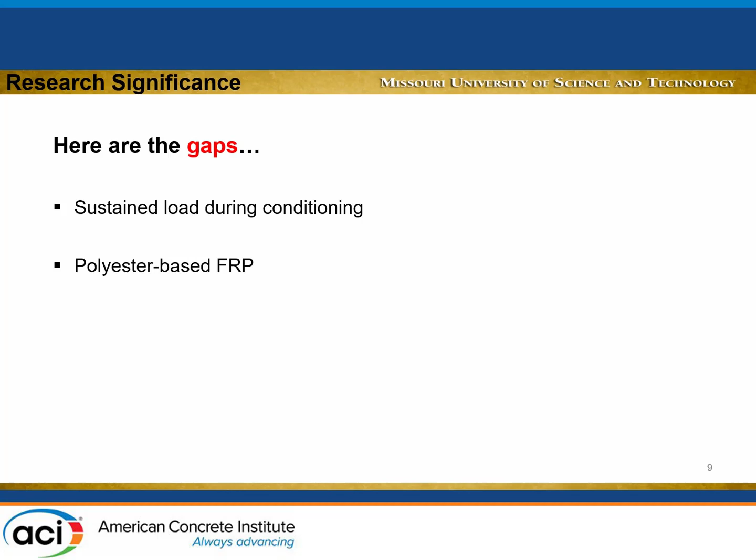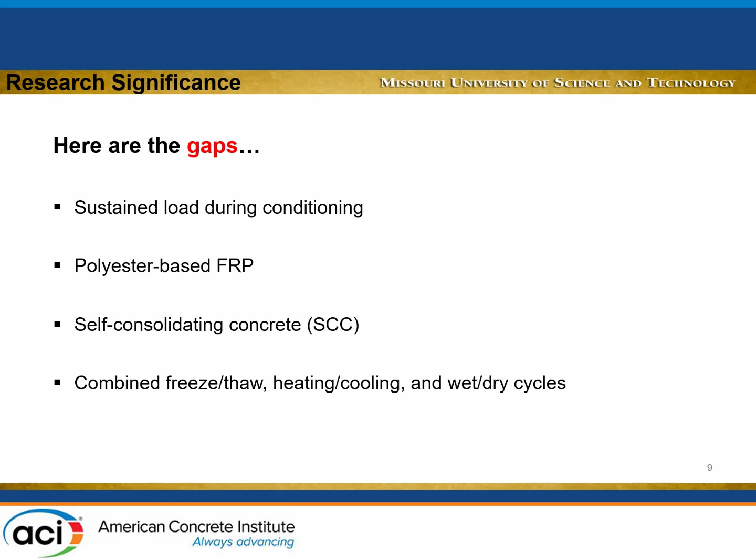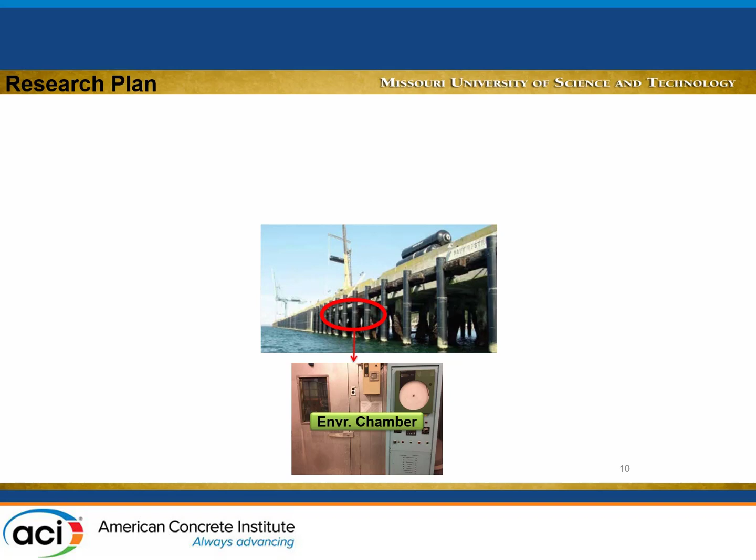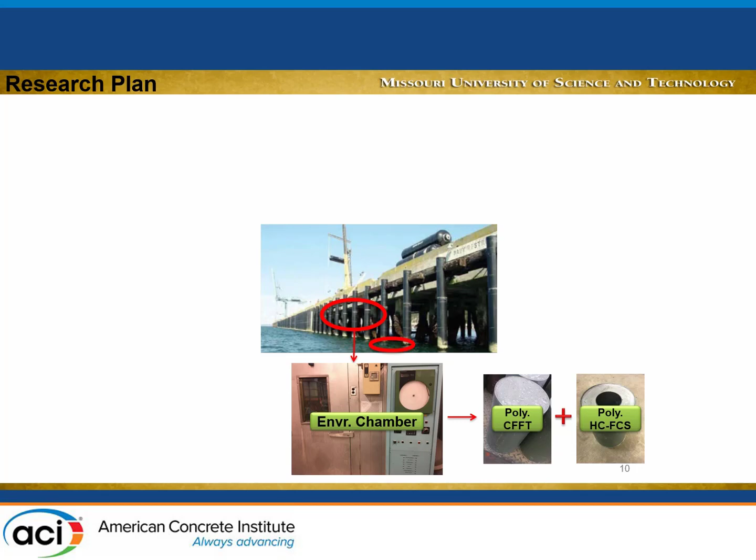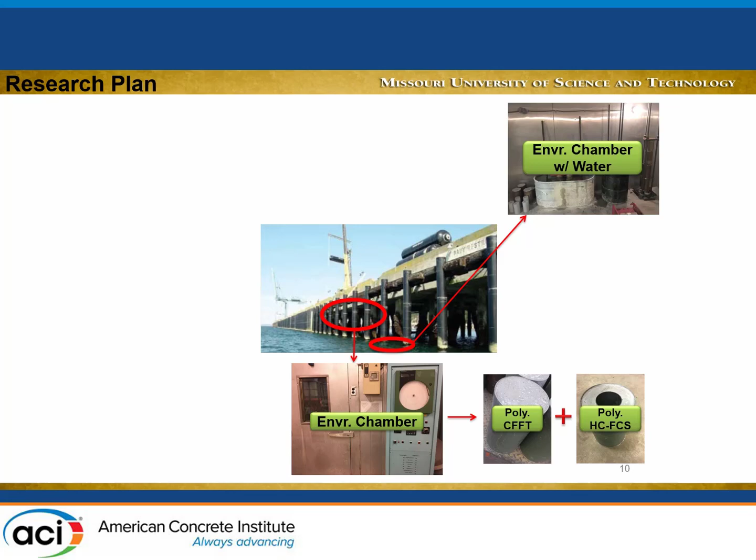There is another portion over here, still subjected to environmental conditions, however it is immersed in water. So we have a second set placed also in the environmental chamber, but rather than a dry condition, we immersed the fiber tubes into water tanks, so they're immersed all the time while we run the different cycles.

The upper portion over here is still subjected to UV. We have some rings of these tubes subject to being placed in a UV chamber. These are the rings that we use for the UV chamber.

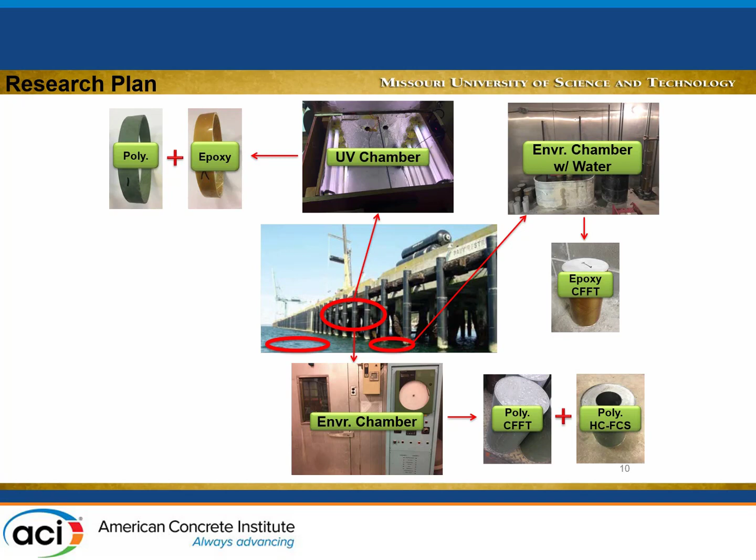As I mentioned, we have two different types of pipes: the polyester type and the epoxy pipe. The color is different. This is just the producer.

And then the last part, the one immersed in water, if it's salt water, we have these tanks where we immersed the pipes, or the concrete filled tubes and the hollow core columns, both immersed into the salt water solution for a long period, up to one year.

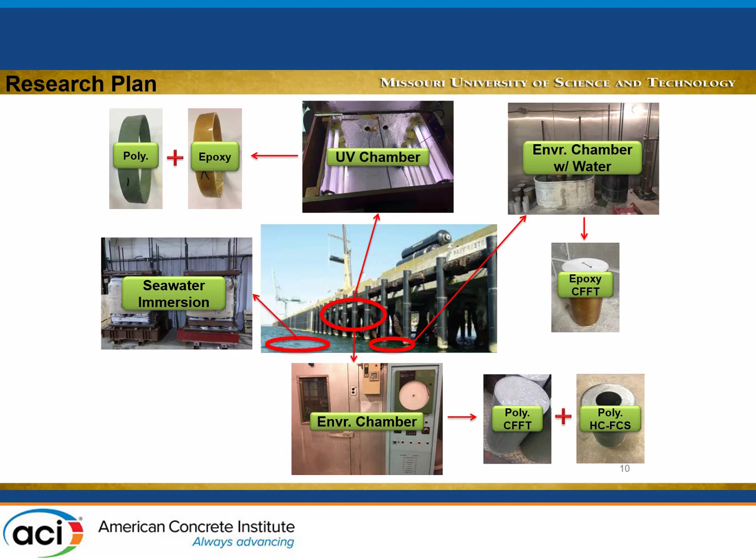All of them are subjected to axial loads while we are testing them, as you will see on the test matrix in a minute. So the first group here are the concrete filled tube and hollow core fiber concrete steel columns, placed on the environmental chamber.

The first group is unconditioned, unloaded. Those are just 3 specimens placed in the lab, poured using the same concrete. Everything is the same, which is why we call them unconditioned and unloaded.

The second group is conditioned, unloaded, placed inside the environmental chamber while unloaded. The third one is conditioned and loaded.

So we have them all placed inside the environmental chamber under sustained load. The sustained load here, typical in bridge columns, is somewhere between 7 to 10%, depending on where you are in the States. So we apply 10% of the axial capacity of the tubes.

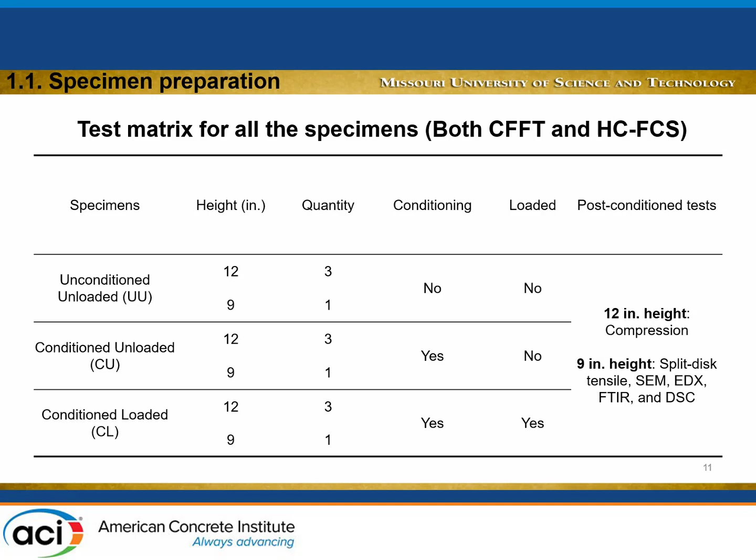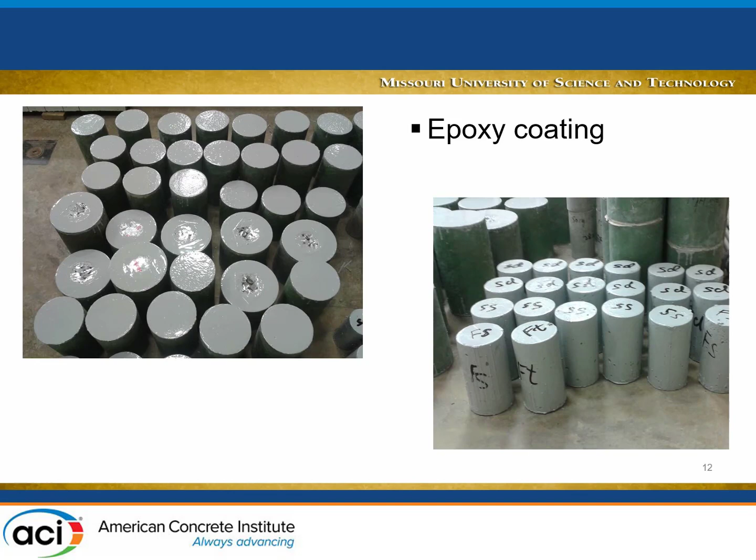Here are the tubes. We have epoxy coating to ensure that all the interaction between the pipes and the environmental chamber goes through the glass fiber tubes only. We also place some concrete cylinders to see what's going on with the concrete itself, so we can draw conclusions about the concrete as well.

So here is the set of specimens. We have 3 sets that we are going to test in compression under cyclic axial loads. The first one is a little bit shorter - for this one we knock off the concrete from inside, slice it, and take the rings for further examination.

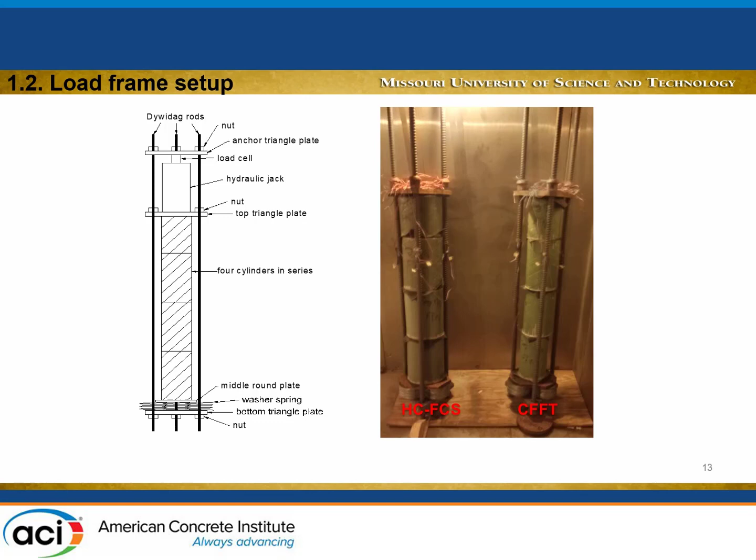We apply the axial load using unbonded post-tensioning, and we have a bunch of strain gauges over here to follow what's going on.

The second group is the one that was immersed in water and placed inside the environmental chamber. So we have the unconditioned one: no load no water, no load with water, loaded no water, loaded with water - different combinations within this group.

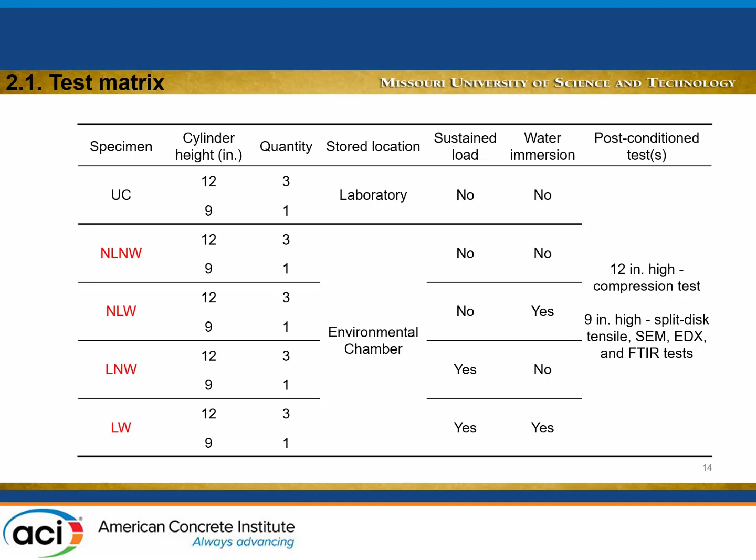This group over here uses epoxy resin, while the first one uses polyester resin. So here are the specimens, loaded with water. Again, we apply loading using Dywidag bars to apply the 10% axial capacity to the columns.

The environmental chamber loading is a little bit complicated. The test regime for the environmental chamber is actually a separate study. A while ago, we had students who collected the bad weather data in Missouri for 20 years, and we compressed all of that bad weather into 72 days.

So we compressed the analysis for about 20 years of periods. It was originally prepared for repair, but we're still using it with MoDOT. So we collected the weather data over 20 years, looked at the bad days, and compressed them into a short period. It ended up with 72 days.

What we have here is 50 cycles of plus or minus, so we move between minus 20 to 10 Celsius, then another 50 cycles between higher temperatures, 50 cycles with relative humidity, and then temperature, humidity, and so on. So the total, as I mentioned, is 72 days or 350 cycles of loading.

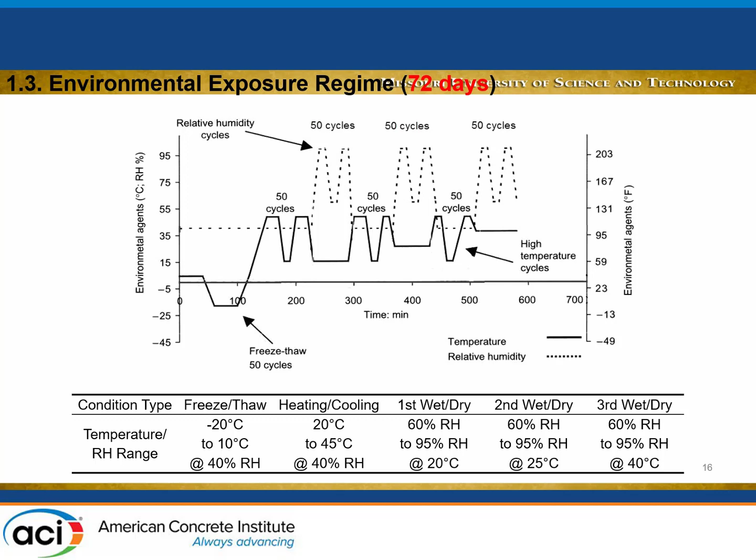The third group of specimens were subjected to, again, unconditioned testing, and then we have these three different tanks. So T1, T2, T3 representing different temperatures, ranging from about 73 up to 140 Fahrenheit. We have three different temperatures, and we ensure the temperature is constant by keeping the water moving, and ensure the salt solution concentration is the same. We take samples of the water every week to ensure the salt solution concentration is consistent.

In total, we have 51 specimens for the hollow core fiber concrete steel, and another 51 specimens for the concrete filled fiber tube.

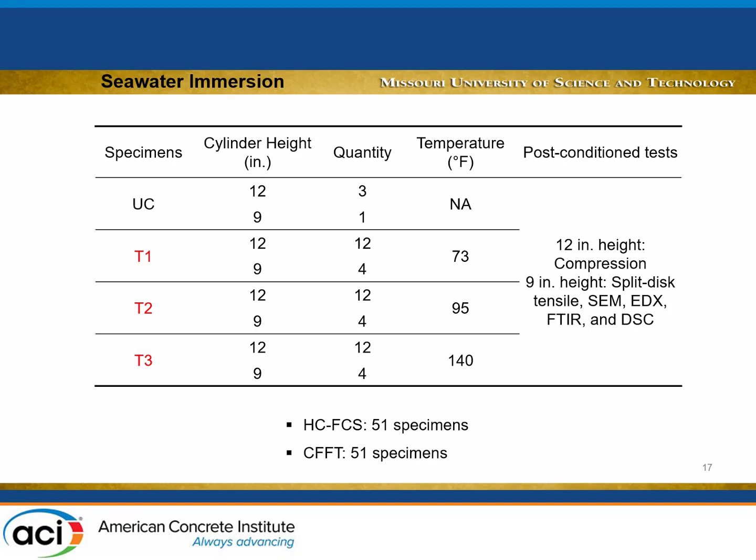For those, we go every 3 months for each tank, and we take some specimens and test them in compression. We run microstructure analysis on all the samples so we can track how the strength degrades over the year. So for each tank, we tested specimens at 4 different periods. During the presentation, we're going to call them B1, B2, B3, B4.

So here is the test setup. What we did for each tank, since it's the same temperature, is have five sets of specimens of concrete filled fiber tubes, and then on the same tank we have 5 sets of the hollow core fiber. And then we have a steel plate.

We load using the Dywidag bars, and we have springs to ensure that the load is constant with time. We have HSS where we can anchor the Dywidag bars. We have load cells and strain gauges on the Dywidag bars, and we regularly monitor the loads and strains to ensure it's constant during testing.

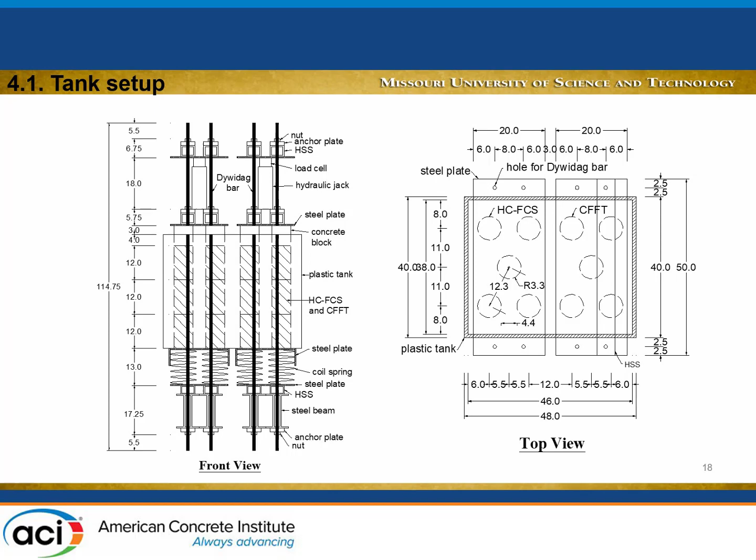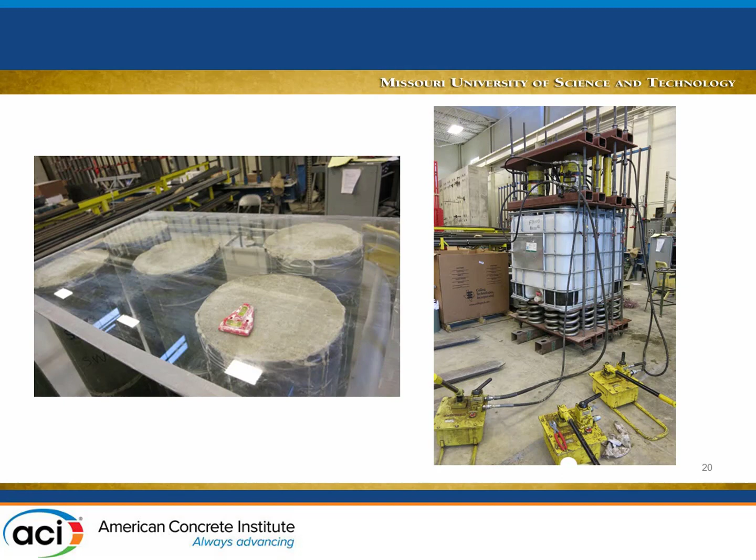And this is a tank. This is how the test setup looks like, and this is while we are loading the test specimens, and this is just how it looks.

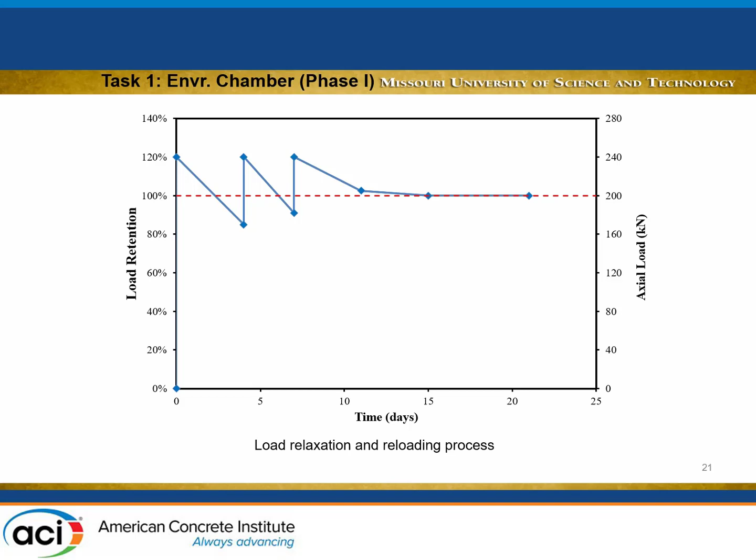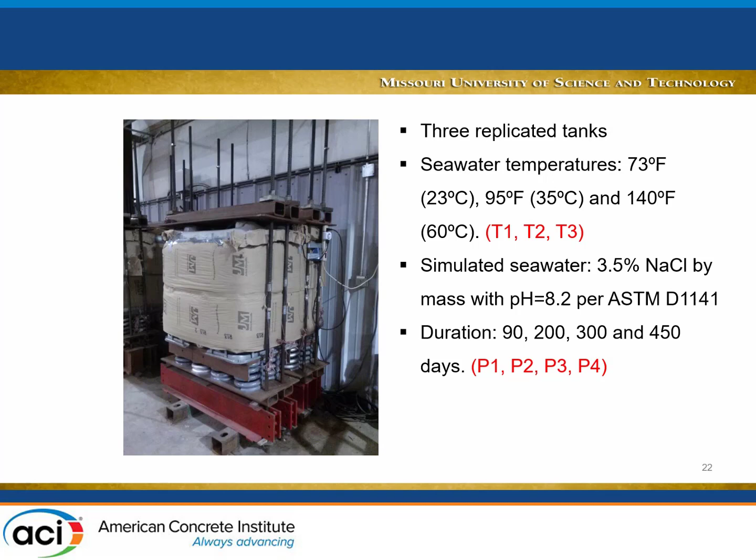As I mentioned, we have 3 replica tanks at different temperatures: 73, 95, and 140. We have 3.5% sodium chloride, and the pH was about 8. Then we take the specimens out at 90, 200, 300, and 450 days, so it's roughly slightly more than a year.

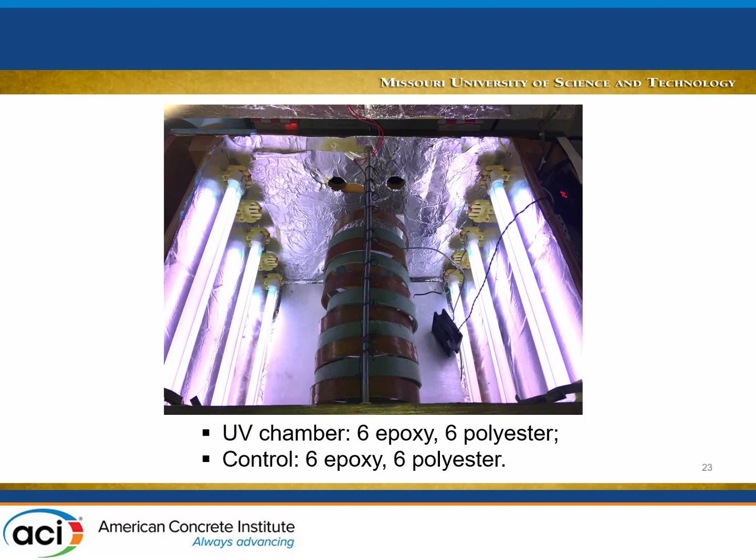On the other group, what we did is slice the specimens into rings, and place them in a chamber where we subject them to UV rays. So these are the rings, and we did this for epoxy specimens and also for polyesters.

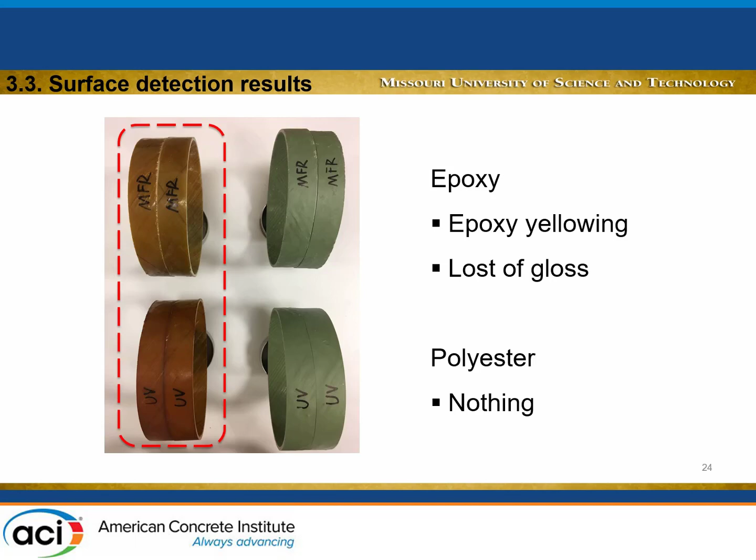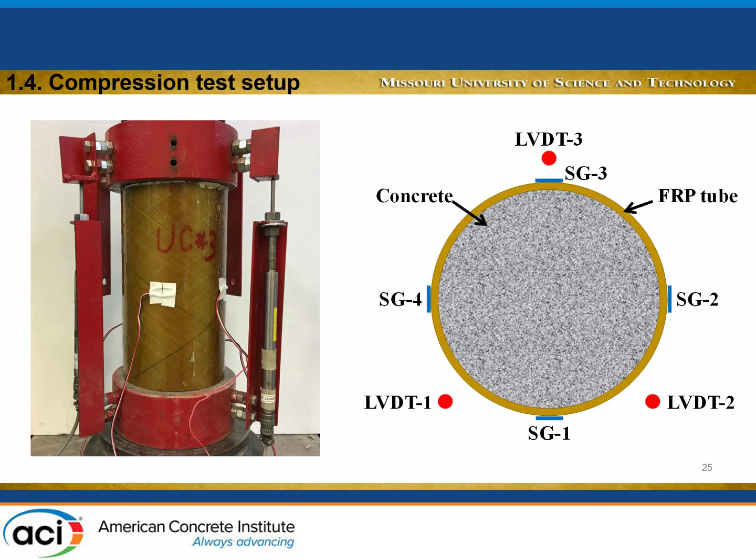Once we take a cylinder out of each one of those groups, you apply compression, and since our interest was in seismic behavior, we apply a cyclic axial load.

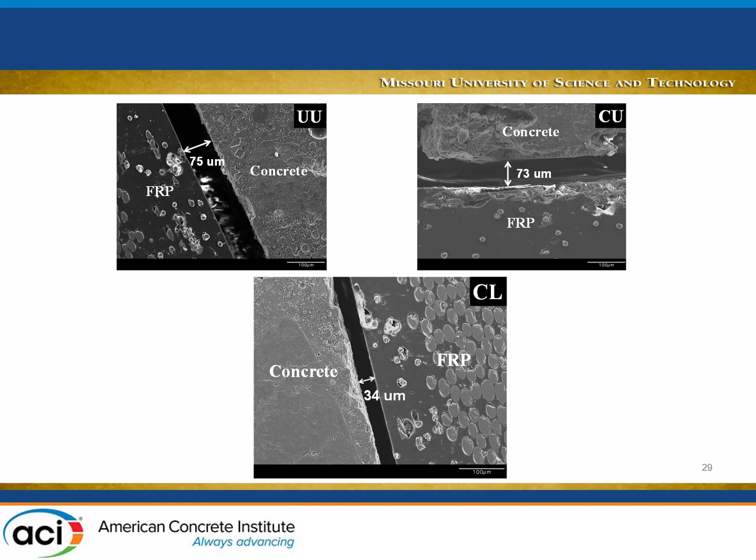So over here, when we apply the sustained load, this gap here closes to about 34 microns, the gap between the concrete and the FRP. This is probably due to the dilation of the concrete under the sustained load.

Here is another sample of the SEM specimens that we got from the tank. This is tank 1, the low temperature, period 2, about 6 months. We don't really see much. We have some holes here in the resin that we believe occurred just during manufacture.

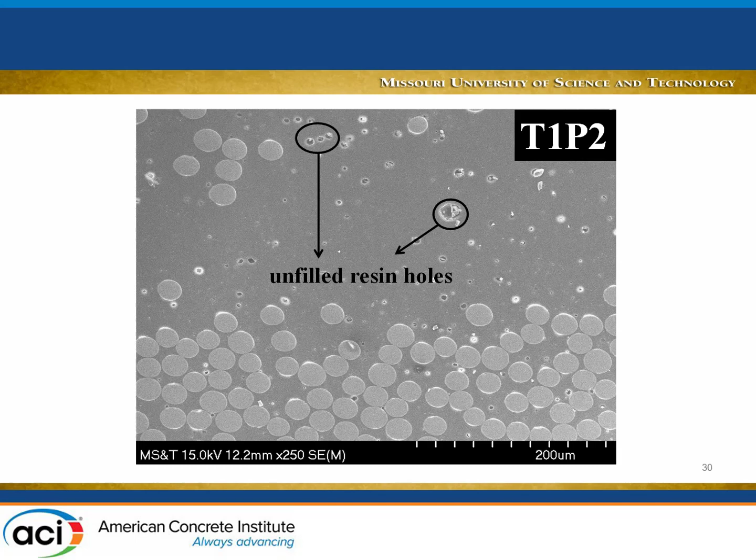As the temperature going up and the duration going longer, you start to see more damage. So let me show one of the worrying things here. For example, you start to see some resin cracks.

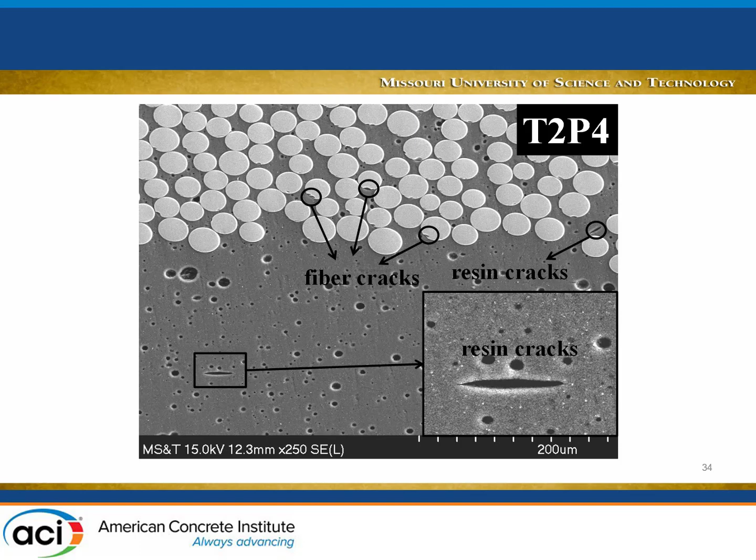This is tank 2, a little bit higher temperature for a year of exposure. You start to see some resin cracks, and you start to see also some damage to the epoxy glass fiber interface. You see here the delamination that you start to see, and some cracking as well.

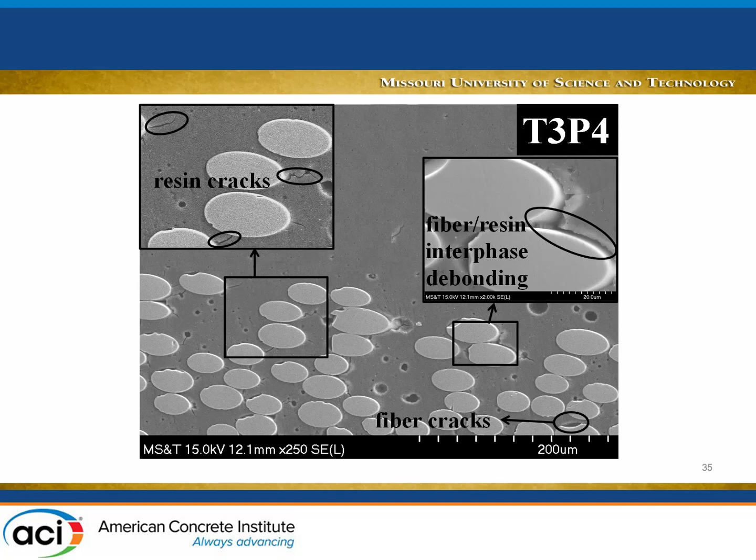This is tank 3 at about 1 year. The microstructure showing some damage at the microstructure level. I'm not going to go through this as we don't have too much time remaining. Okay, here is a damage.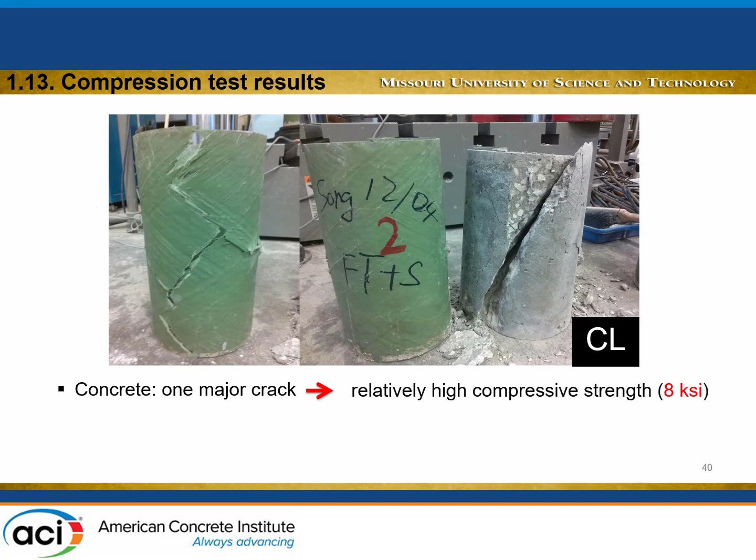What's really interesting after the exposure is typically you see the FRP become more embrittled, and this is converted to become more brittle. This brittleness you can see even in the sound - the one that was exposed to a higher duration for a higher temperature, for example, you hear a very high-pitched sound when it was crushed on the lab.

And concrete, because this is relatively high strength concrete, you don't really see too much damage. It's typically a single big crack, and then it continues like this.

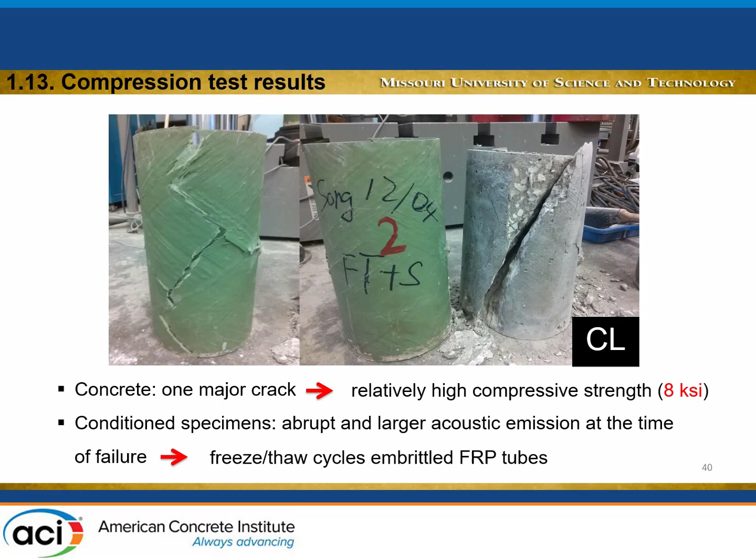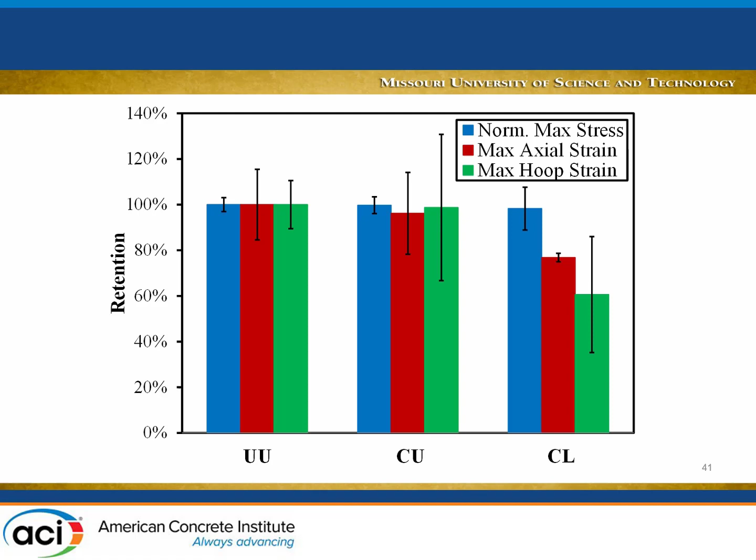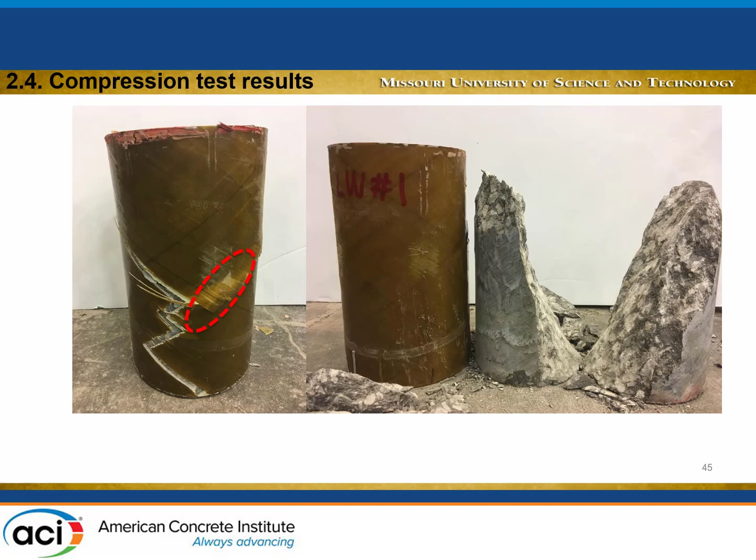This one was placed in the water inside the environmental chamber. Again, looking at the mode of failure, we found one interesting difference. The one with the epoxy shows more delamination first, versus the one with the polyester, where we see a complete pull out of the fibers from the resin.

Looking at placing them in the water, we didn't really see much difference. Epoxy is much better than polyester here. For example, if you have unconditioned specimens, the retention is 100% in terms of axial strain. But when you expose them to load and water, we lose about 8% in terms of strain, and about 9% in terms of stress. So you don't really lose much after probably 3 months of exposure in the water.

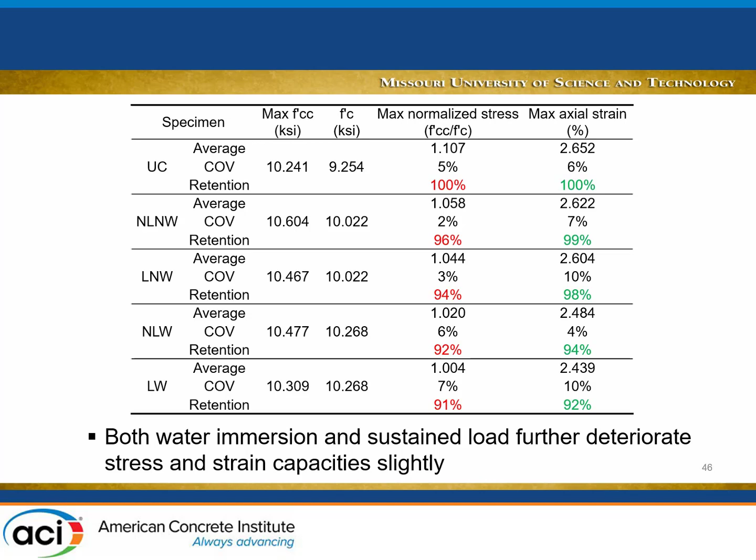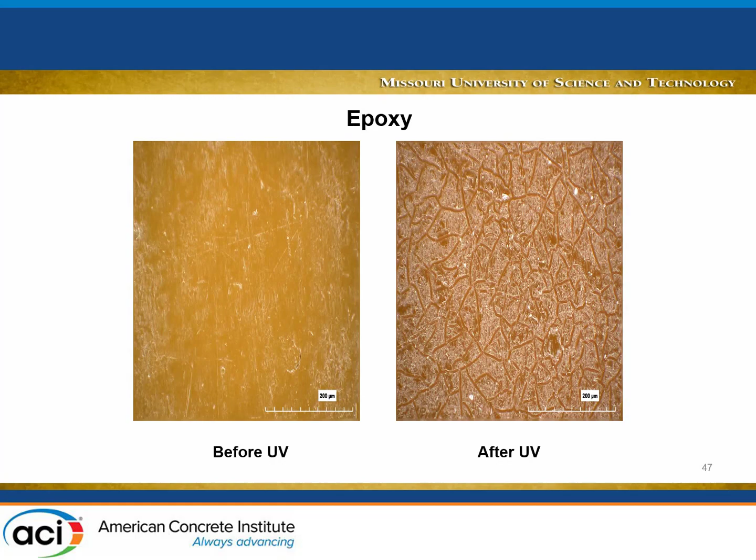This is just how the specimens look after the UV exposure. You see some micro cracks, if you like, on the surface here, but it's superficial, because when we did the ring test, we didn't see much difference in terms of strength and strain.

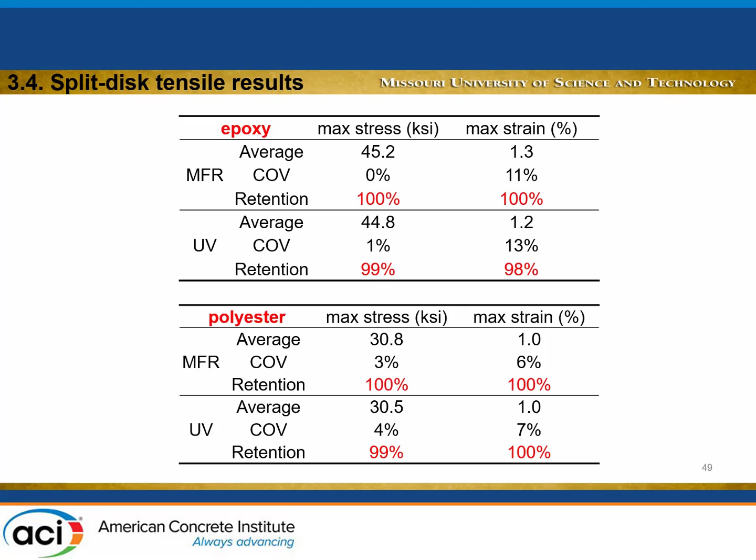So this is when we tested the ring after the UV - you lose 2% here for the epoxy, and for the polyester we almost lose nothing.

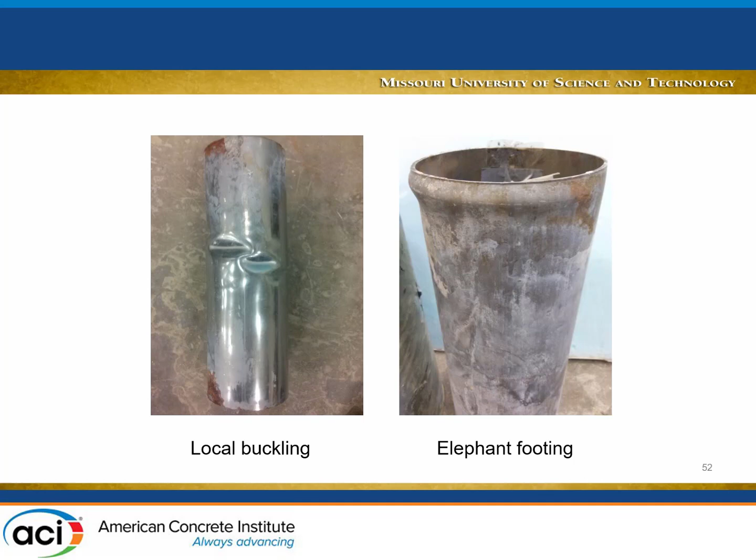These are the specimens that were placed in the tanks. Some buckling on the steel inside the tubes, and this is the normalized strength. Whenever we have a really high temperature for a long duration, you really lose about 40% of your axial capacity. The reduction here decreases as we go.

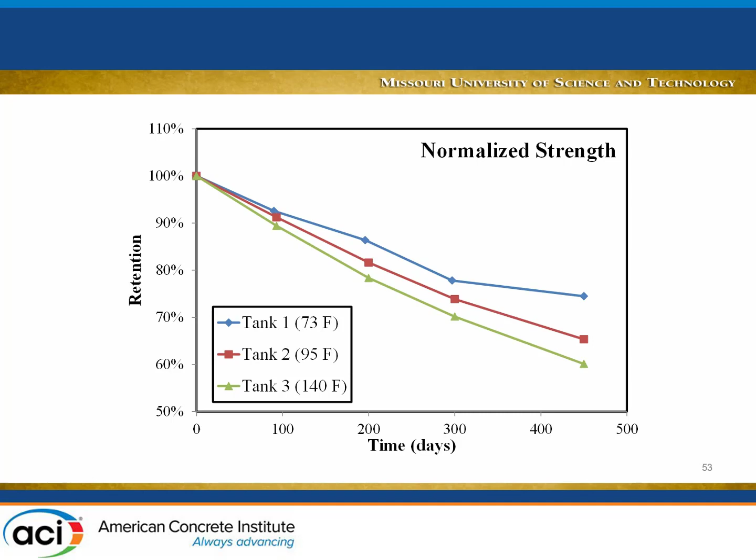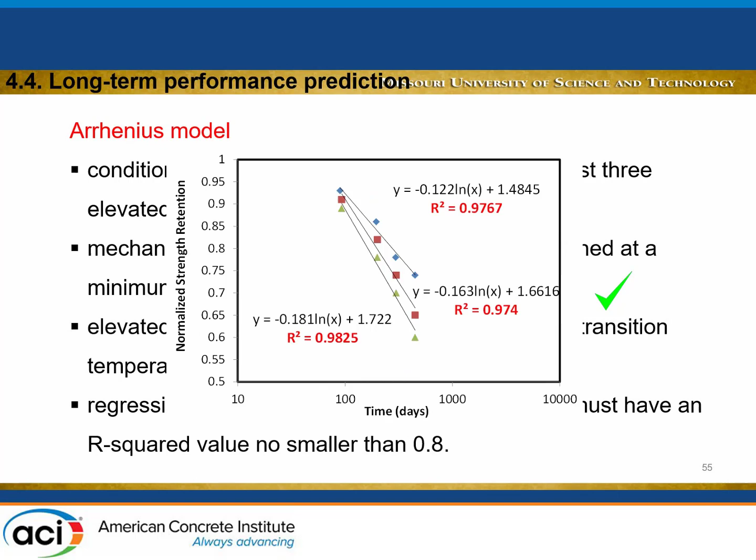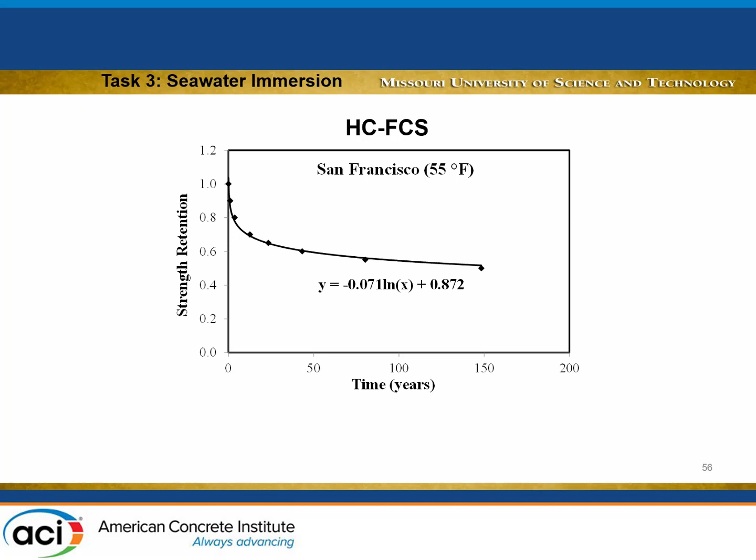Then we used Arrhenius model to see how this would be reflected in the long-term behavior. For example, we looked at a few cities - we take San Francisco, and assume different service lives: 50 year, 100 year, 150 year. At 150 years, you lose about 50% of the capacity of your column, because of the 55 degree exposure and using this model.

Then we ran the same analysis for concrete-filled fiber tubes, across different cities in the US. With this, I reach the conclusion of my talk.

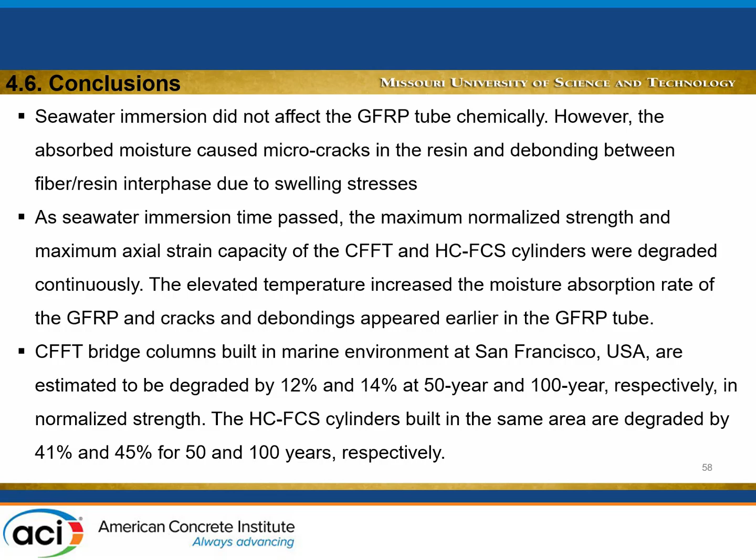The one that was really severe is the salt solution for high temperature and long duration exposure. UV didn't really do much damage to the specimens, and generally, as you would expect, epoxy performed much better than polyester. However, when it comes to cost, epoxy is about double the cost of polyester, so you need to do your math and see which one is better for your project.